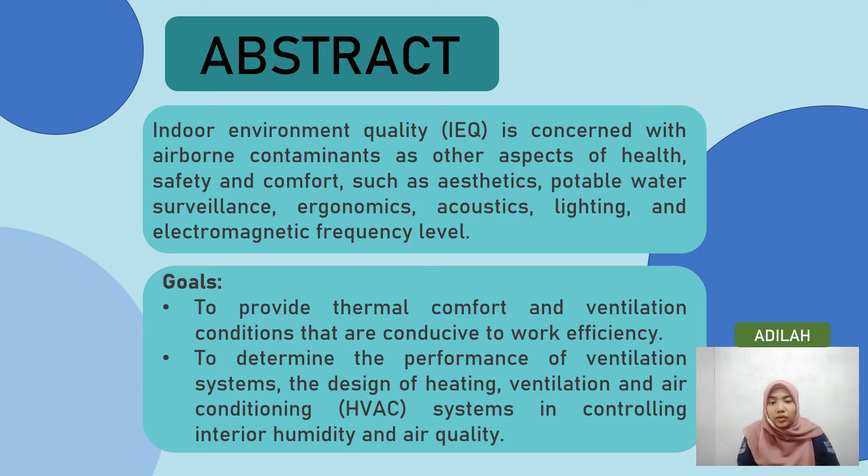And our goals in this project are to provide thermal comfort and ventilation conditions that are conducive to work efficiency, and also to determine the performance of the ventilation system, the design of the heating, ventilation and air conditioning (HVAC) system in controlling the interior humidity and air quality.

The result revealed that when the ventilation is increased by turning on the air conditioning system, the office workers' productivity rises. And we're proposing using landscaping to improve the inside environment of an existing classroom to its natural state.

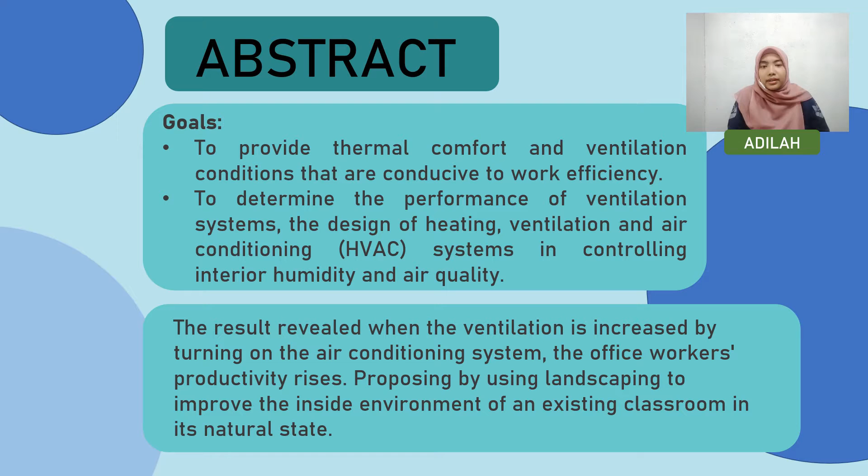Indoor environmental quality, IEQ, is a general indicator of the quality of conditions inside a building, the quality of a building environment in relation to health and well-being. IEQ is a very important cause that can affect inhabitants' health, comfort and productivity. Also, there is the potential impact of indoor air quality on human health.

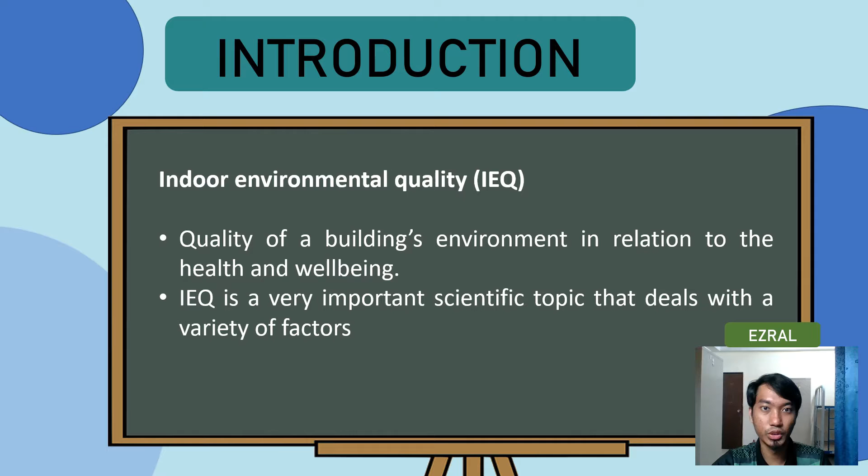Indoor air pollution has been shown to be one of the most significant concerns. Indoor air pollution will have an impact on health as an immediate, intermediate or long-term effect. For the immediate effect, it can cause irritation of the eyes, headache and also fatigue. For the long-term effects, respiratory disease, heart disease, cancer and lastly fatality.

Overall, IEQ goals often focus on providing a comfortable environment for occupants and also minimizing the risk of building-related health problems and improving quality of life.

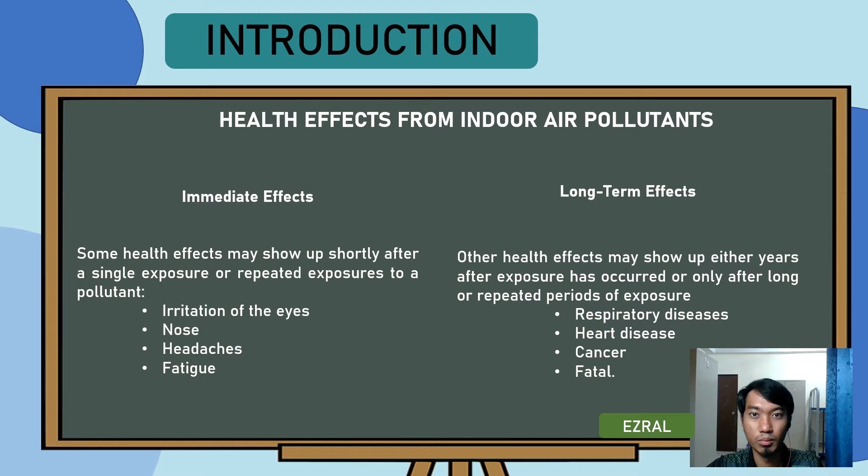FILA table. Since this project aims to understand the importance of IEQ, indoor environment quality, in an office, our group decided to approach the study based on the air conditioning system. And through our readings, we were able to decide on a title for this project, which is on the idea of the impact on teaching and work efficiency in Malaysia in terms of thermal comfort and ventilation conditions.

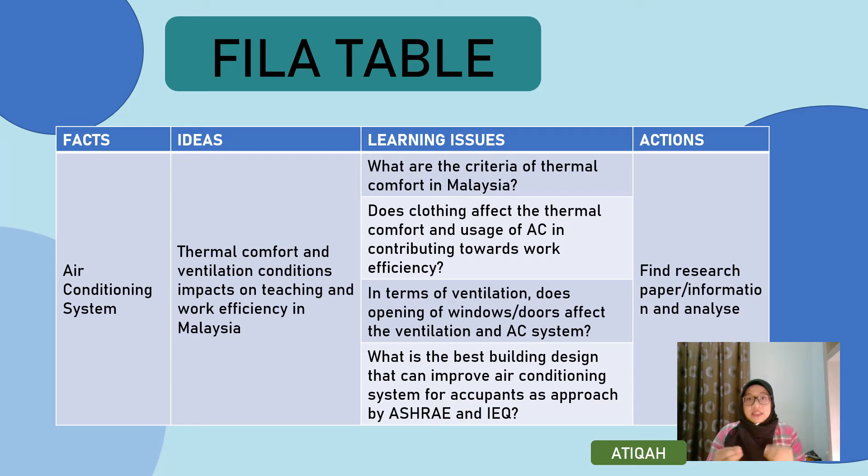So, through brainstorming, we were able to identify 3 learning issues. The first one is, what is the criteria of thermal comfort in Malaysia? Second is, does opening a crack of windows or doors affect the ventilation and aircon system? And last but not least, in terms of building design, what is the best building design that can improve IEQ for occupants? So, in this technical report, we collected our data and information from research papers.

I will explain the literature review for this project. Basically, the term indoor environment quality is wide and consists of a variety of factors that comprise the indoor environment. From previous studies about IEQ, all findings are concluded into a table for easier understanding. Research by Arif stated and highlighted that the relationship between IEQ and occupants' well-being is quite complex. Also, he stated that specific considerations, like the design of buildings, on occupants are required.

Besides, research by Batterman on the review and extension of CO2-based methods to determine ventilation rates, with application to school classrooms, concluded that ventilation rates are critical parameters that relate to building energy performance and the health and comfort of occupants. This shows that improved VR measurements may benefit many applications, including research examining the linkage between ventilation and health.

Lastly, research by Daghigh, which is assessing thermal comfort and ventilation in Malaysia and the surrounding regions, found that the thermal comfort range is higher than expected by international standards for a hot, humid climate. Thus, proper ventilation and healthy indoor quality have a great influence on the sensation of thermal comfort for occupants of a building.

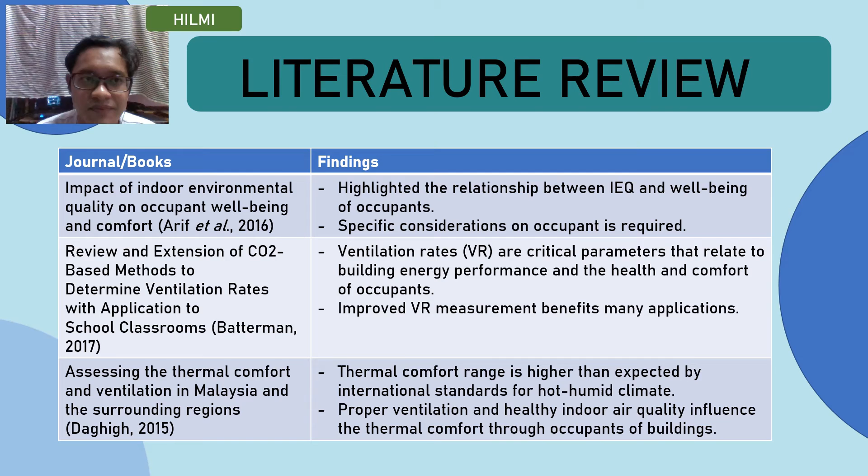Okay, first we start with identifying the problem statement. Second, determine the objective of the study. Third, the literature review based on previous studies. After that, we obtain the result and discussion. And last, we state the conclusion.

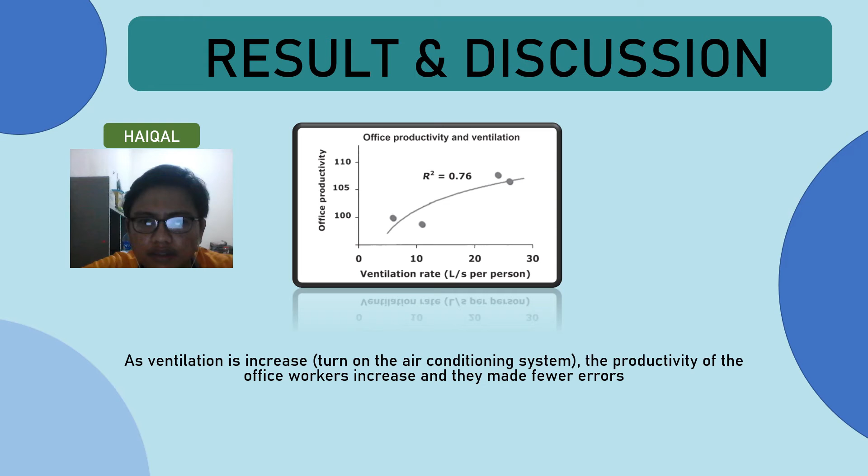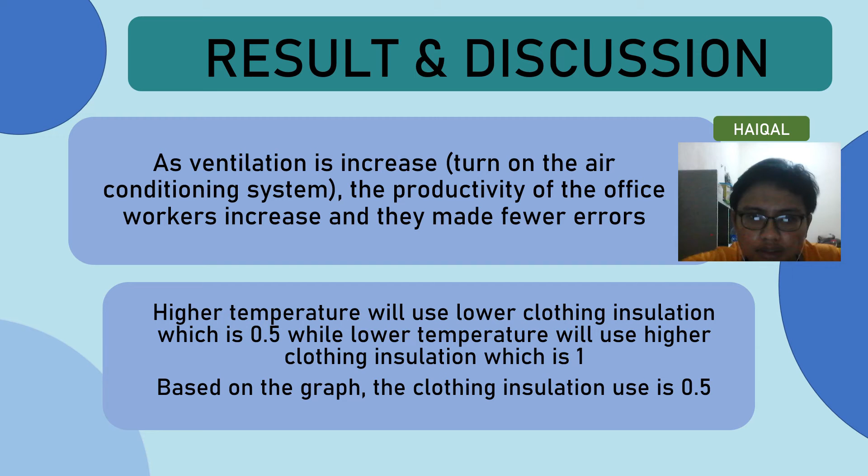For result and discussion, as ventilation is increased, the productivity of the office workers increases and they make fewer errors. High temperature will use lower clothing insulation, which is 0.5, while lower temperature will use higher clothing insulation, which is 1. Based on the graph, the clothing insulation used is 0.5.

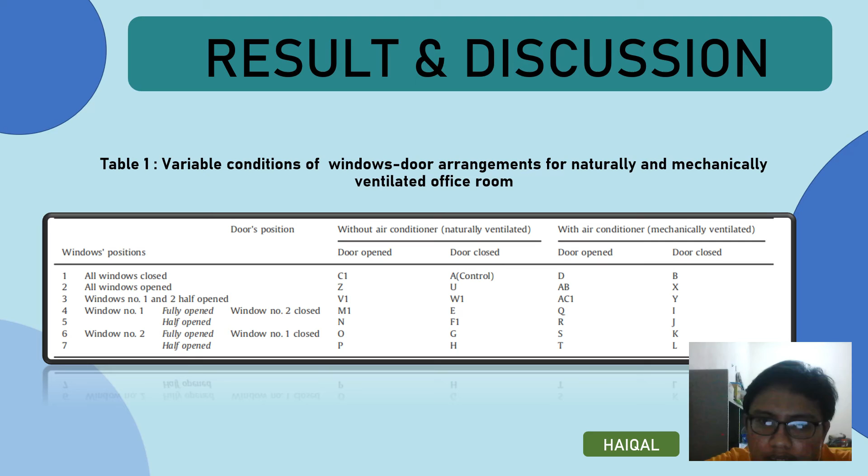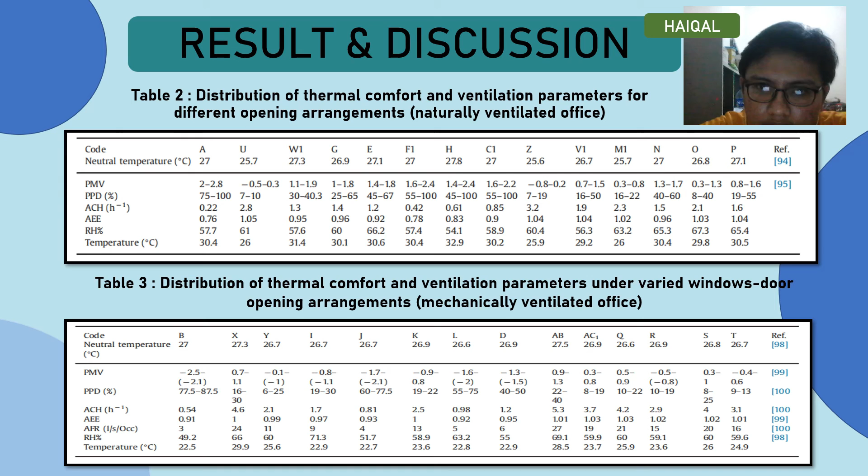Table 1 shows the variation conditions of window and door arrangement for naturally and mechanically ventilated office rooms, while Tables 2 and 3 show the distribution of thermal comfort and ventilation parameters for different opening arrangements for the naturally ventilated office and mechanically ventilated office.

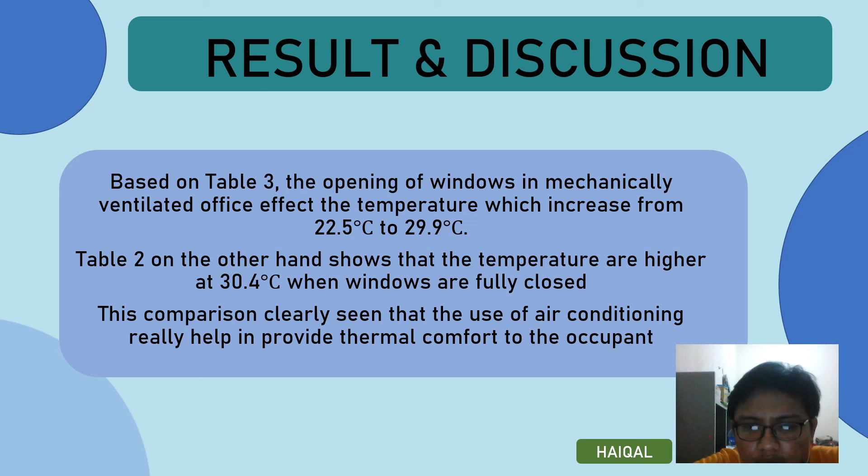Based on Table 3, the opening of windows in the mechanically ventilated office affects the temperature, which increases from 22.5 degrees Celsius to 29.9 degrees Celsius. Table 2, on the other hand, shows that the temperature is higher at 30.4 degrees Celsius when windows are fully closed. So basically, for the proposed intervention setting for the room environment, we use the application of landscaping, which uses Lily and Janet Craig plants.

Conclusion: indoor environmental quality is very important because of its impact on health, comfort, and also productivity. From previous studies, occupants are less productive when using natural ventilation. In this project, total volatile organic compound, TVOC, reduction will be proposed to reduce air pollution by minimizing humidity and to minimize the air pollution.